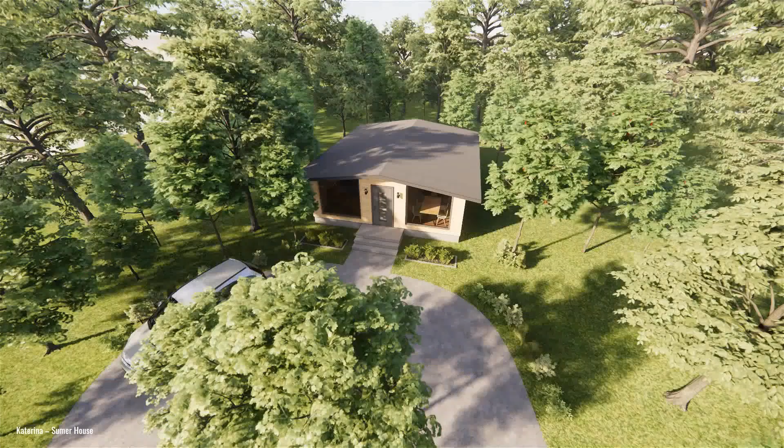So here's a little animation that I want to play. It might be a little bit choppy there, but I want to understand what you guys are seeing there.

Hopefully you guys start to understand not just the overall picture of the space, but also the movement and scale of your project. And if you're able to change stuff on your model, then you start to understand the project.

Let me just quit the share here. And this is the actual model here. So I'm actually driving this and able to go inside.

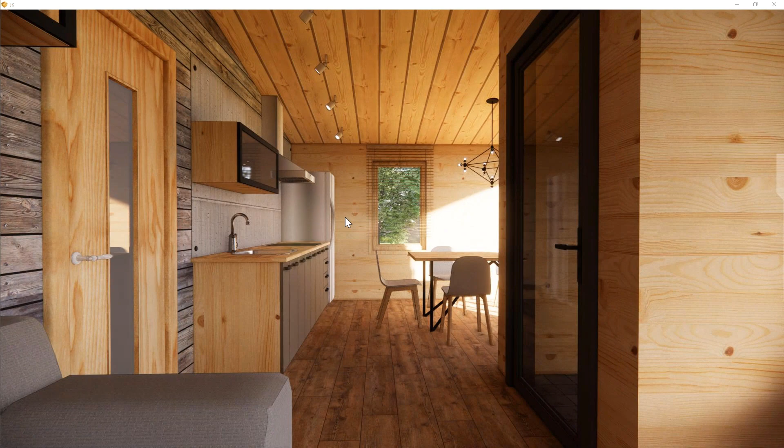Let me pull away from the Enscape side and then move on to the actual 3D modeling software. In this case, it's actually SketchUp.

Hey Joseph, there's a question here about what GPU you're running. Go ahead, there was a question about which GPU you were running.

Oh, I'm actually using an NVIDIA RTX 2080 Super at the moment.

I understand there's a bit of choppiness in terms of frame rate here, but I promise it's actually quite buttery smooth on my screen.

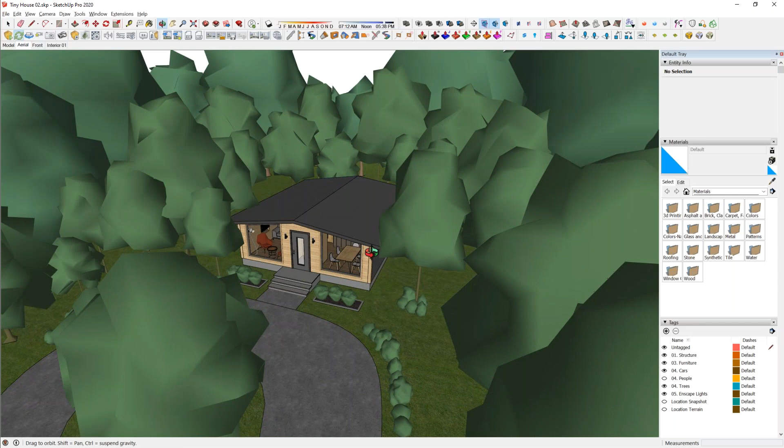So what you are just seeing is this model inside of SketchUp here. You can see it's more of a simpler format inside of SketchUp, yet it gets all rendered up inside of Enscape. So to show both screens at the same time, I'm going to snap one side to SketchUp on the left and Enscape on the right side. Then I'm able to either move out or just synchronize the view like that.

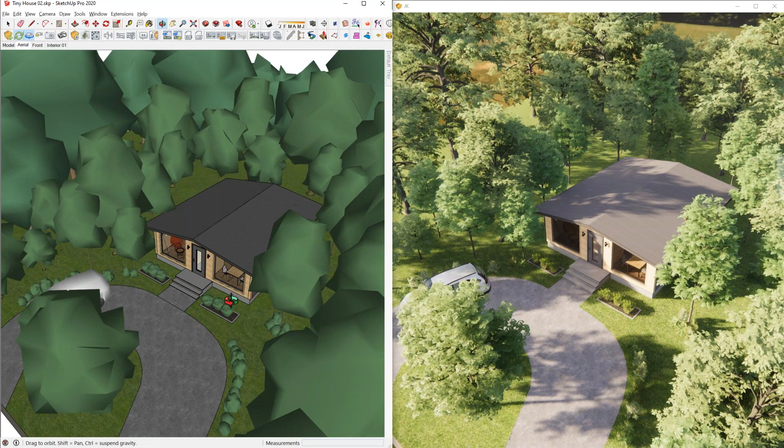This becomes incredibly useful because you can actually have the Enscape screen shown on your presentation screen. Let's say you're sitting inside the presentation room, or if you're doing a presentation, then you just maximize the Enscape window on your shared screen side. Then you can have SketchUp shown on your side so that you can navigate through your SketchUp model, yet your client sees Enscape on the presentation. So it becomes not only just an image, you're able to do this live presentation, as I am doing this live webinar format.

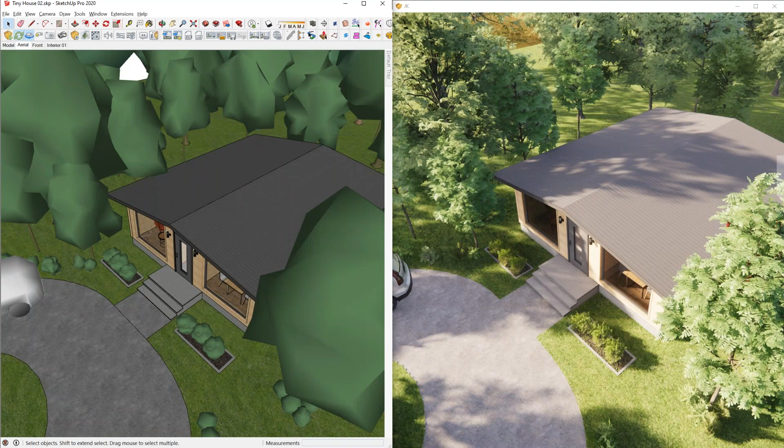So I mentioned about changing something on your projects. For example, we can talk about how much vegetation or how many planters we can have inside of your model. So we can go ahead and increase the amount, and everything will be changing on your presentation side.

Just to demonstrate, let me go ahead and change the cladding on the building here. As I apply that material, everything is immediate. So you start to talk about, okay, what would you like on your project? What kind of material? What's the size of the door, the size of the opening? What kind of lighting would you prefer? We can have that design discussion, and hopefully the architectural role people here would be able to appreciate this sort of design communication method that we have with Enscape.

So changing stuff inside of your model not only allows you to understand your project better, but also you start to connect together, so your client, your project, and yourself kind of become more emotionally connected. And it's so much better than just saying, okay, I have some ideas, let me get back to you in an email in a couple of days. I think having that discussion is really, really important.

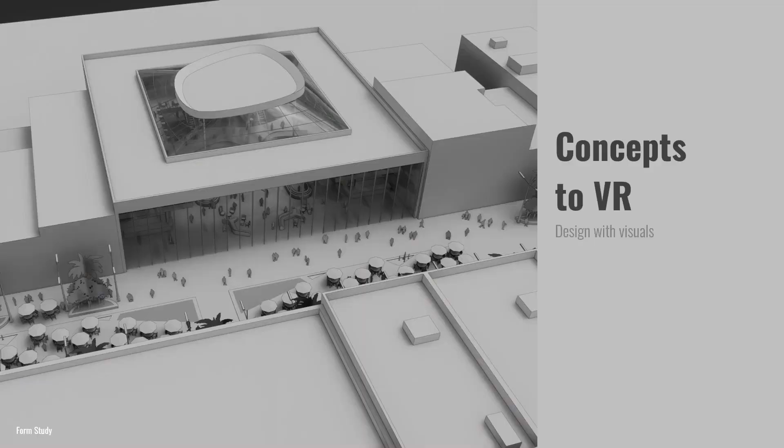So let me go back to the presentation. The next thing I want to cover is concepts to VR. This is the idea where you cover everything from the beginning of the project to the very end, and I just kind of snuck in VR at the very end. So this covers everything from programming to schematic design, then design development to construction drawing and construction admin, and then a very visualistic type of presentation with VR. VR could really happen anywhere during that process, but we want to implement the rendering process from very early on in a project.

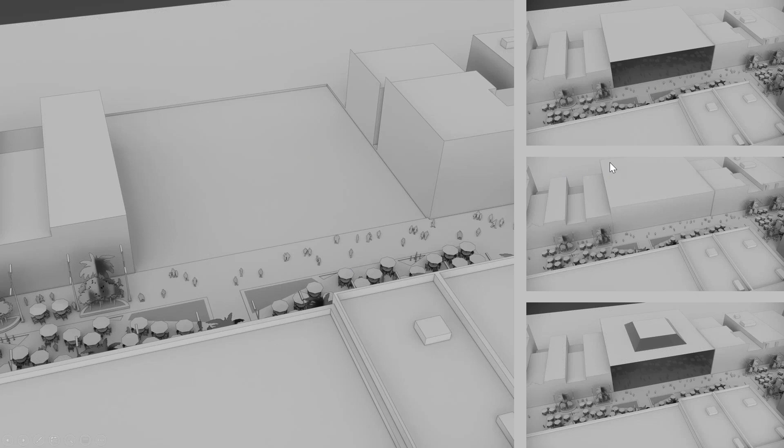So here is sort of a diagrammatic type of render. Obviously, I understand a lot of people are doing this already, but we are looking at the site and then start to do some openings or glazing, figuring out how we're going to fit into it.

Notice we took out all the material, overriding it so that it's shown in white mode, the clay render. This is actually part of Revit. I was just trying to do a storefront study, and the rendering accompanied by the drawings is really powerful because you start to understand the actual scale, but also what it does in terms of 3D view.

Some of your clients may just not understand everything in the drawing. If you showed just the plan, they don't really understand how the storefront is supposed to work. You're able to have that conversation of what the material is going to be, how big the storefront is going to be, and what the glazing is going to impact in terms of size. Some things that are not as apparent start to show up as you have 3D renderings or 3D perspective or orthographic views.

So you should use those together. Also with the rendering, you start to produce a mood board of the project. You typically lay out certain types of materials, do hand sketches, talk about the plan, and then start to put together how those materials really work for your project.

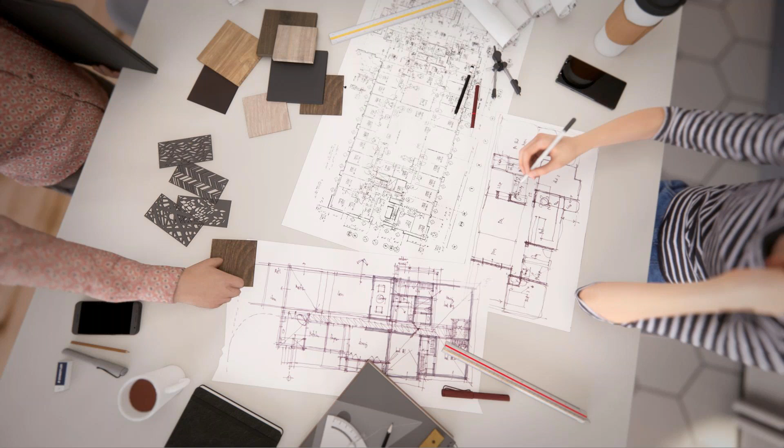Instead of just relying on the physical mood board, you can apply all of that to your project and show your client how those materials really play together. You show some architectural drawings to show them what the layout is like and how the materials are playing together inside of your project.

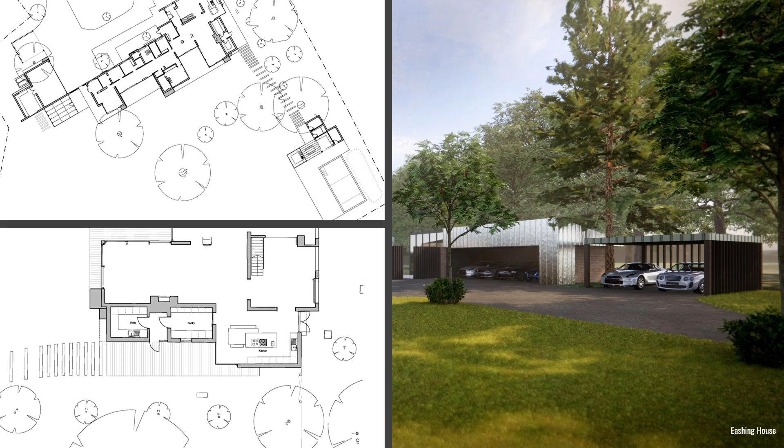Because all of this is immediate, it becomes really powerful. You can start to change certain aspects of the project - replace the brick with something else, or change the tone of the brick, and discuss whether that's going to work together or not. So you can really utilize the real-time rendering that it brings to the table.

Let me also mention - all of this is done inside of Enscape. You can invite your clients to wear a VR headset and be able to walk around those spaces as well. It is most beneficial in a space where you start to understand the scale and how the spatial quality is understood by your clients.

Something like an exterior shot like this, you may not experience as much, but when you jump into an interior - it could be a kitchen, or a really big commercial space like an atrium or retail space - you can start to walk around and really understand how high the roof is, or how high the ceiling is, and how big the openings are.

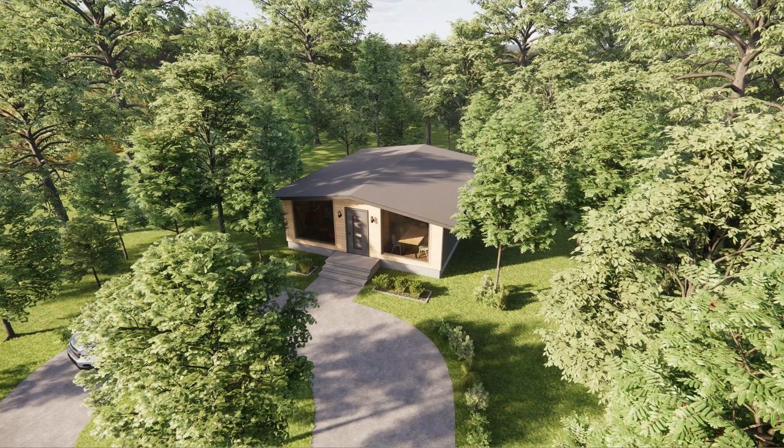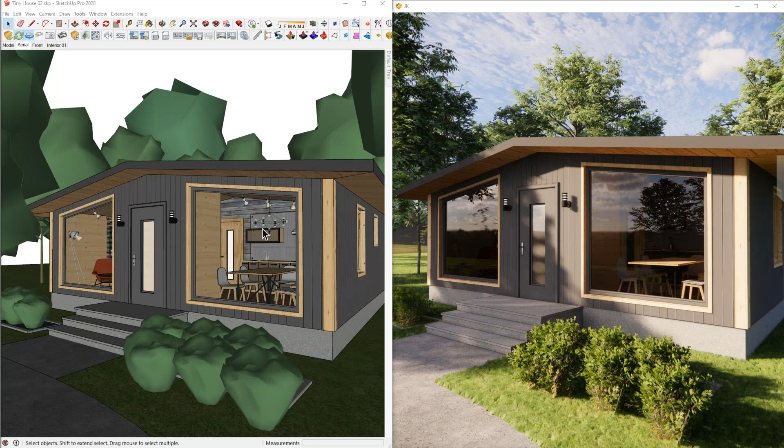So let me go ahead and show you what I'm talking about. The little tip I want to suggest is when you use the asset library inside Enscape. Let me pull up the asset library here. So if I go to vegetation...

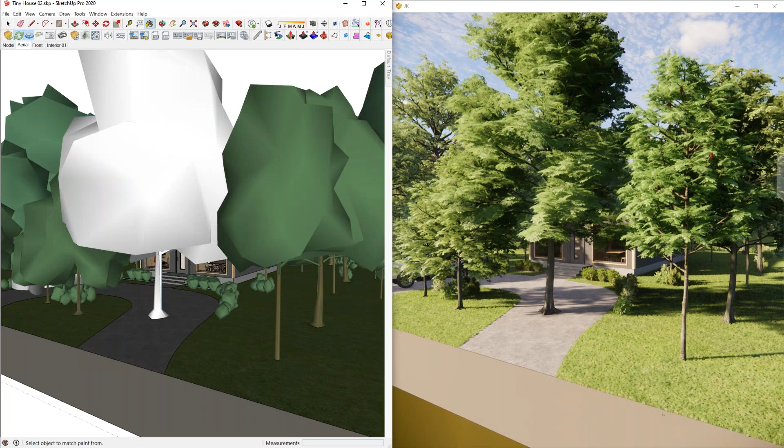And then put down any sort of tree here, you'll notice they come in as a white blob, and you can kind of see that it's a tree even without seeing the rendered version on the right. But it's more helpful to have the green and brown stem or trunk of the tree. So my tip here is to apply green onto the foliage on top - triple click and apply that color - and then also sample the brown trunk or stem color and triple click to apply that.

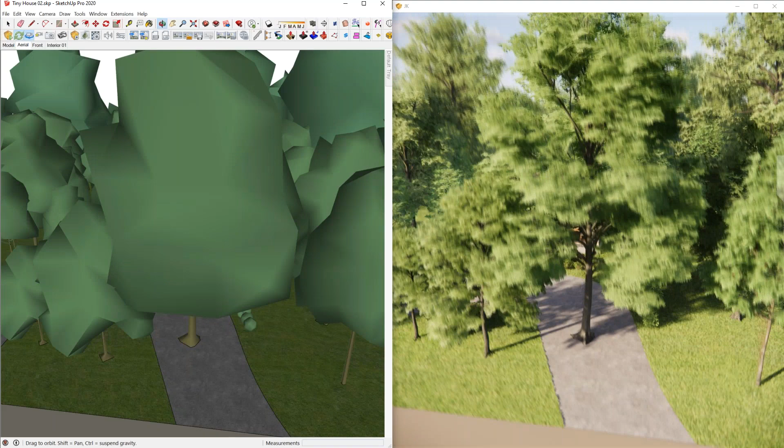Or I can actually just apply it to the outside, that way it just sort of receives there. That way it's more representative of what the tree is supposed to be, instead of having a white blob. That way everyone understands this is a simpler form of a tree - it doesn't take as much resource on your view, yet it renders up really well inside Enscape.

So hopefully you're utilizing much less of those white boxes, the proxy elements, and materials that are more representative of what you're supposed to see inside your render. That way it is not destructive.

Another thing I want to avoid as I work up my design is saving out any copy of the file, or saving out any unique scene inside your file. As you do that, you break away from your existing model to a rendering model, and you start managing two different models for your renderings.

That was sort of the known workflow, or used to be the workflow you typically do as you work up your visualization or rendering process. But we're starting to use rendering as a design tool, and we want to avoid that so we don't waste resources or time trying to do that.

So the overall goal is to make the CAD software, the 3D modeling software, a more simplified version, while Enscape is sort of the enhanced view mode that you can see. The render really needs to complement the design process, not get in the way.

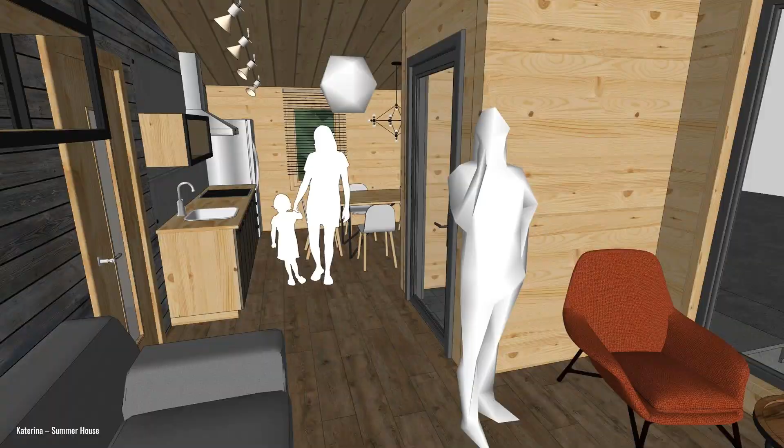So the next piece of advice I want to give is to focus on your project. This goes hand in hand with a non-destructive workflow, but also removing distractions. Obviously we want to work on composition that shows the story - what are we trying to show inside of your view? You want to center the things you want to show in the middle of the image or screen, and then focus on certain material, geometry, architecture, the space you're designing.

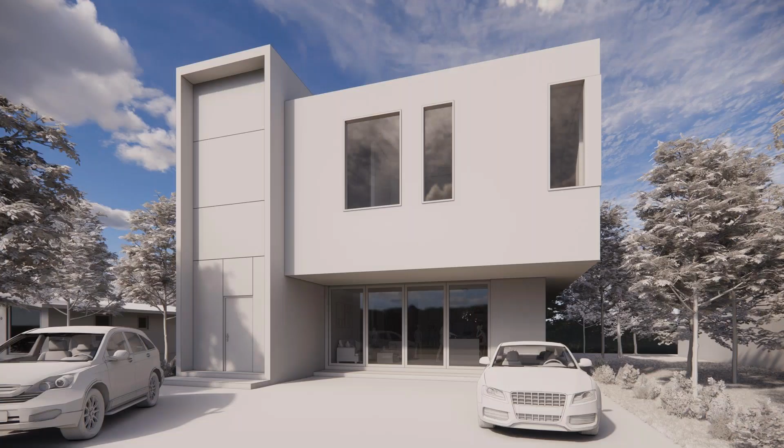So here I've taken out material completely. We all understand this as either clay render, white render, or material overridden view if you come from the other side. Sometimes I find materiality could be quite distracting - I don't want to discuss the tone of the wood and the actual patterning yet. I just want to sell the form and discuss the architecture we are designing, how it is floating above and attached to the vertical circulation on the left. So I want to utilize that mode, which is available on the Enscape side.

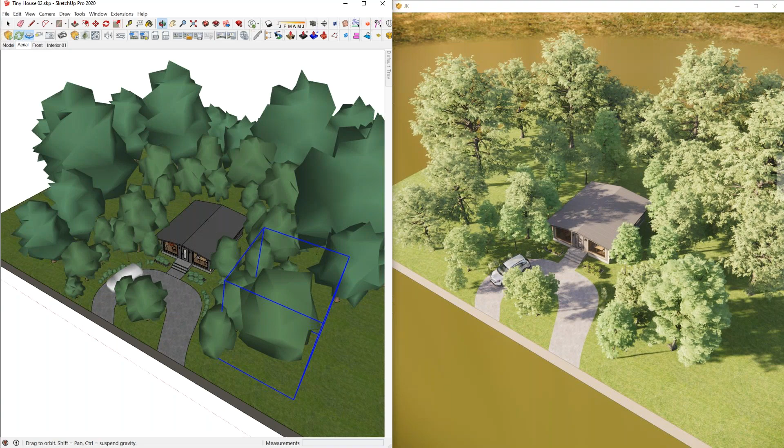Let me go ahead and break out to here. Under the visual settings, which is hidden at the moment - there's a button right there, and I can click on that. When this dialog shows up, let me snap this screen to the left again. I'm trying to wait for the screen share to catch up with me.

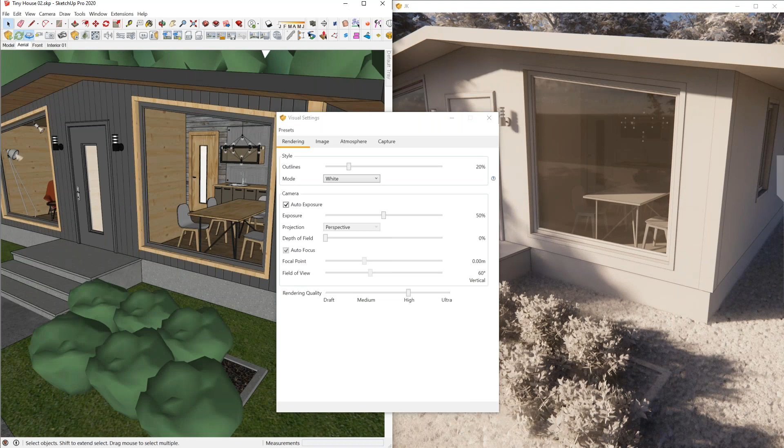So in here, as I have the view synchronized, I can just change the mode to white, and this is more of the material overridden view. Everything that is either glass or water is still understood as glass or water, but everything else becomes white. That way you can start to talk about the form and the space instead of a specific material being shown inside your visual. So that's what I like to utilize whenever I'm trying to present my project and their form.

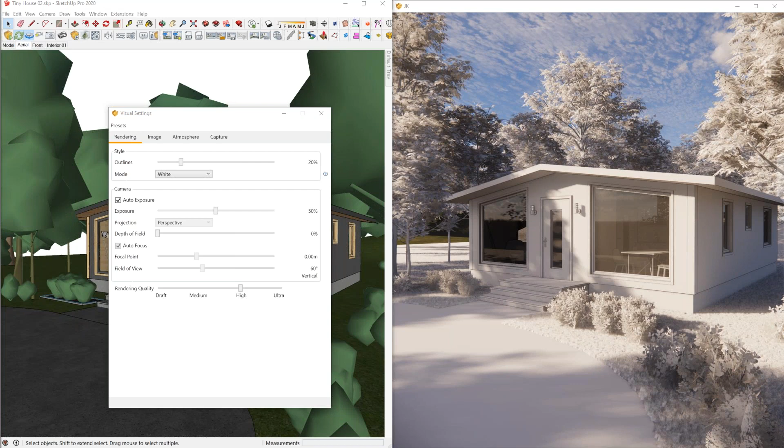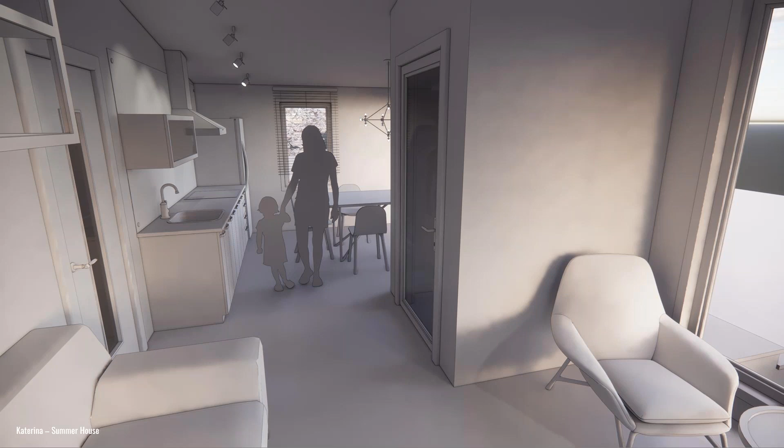So I want to bring this to the table since I saw a lot of people using SketchUp, people who are used to using SketchUp and Enscape. Let me go ahead and show this here, and then Enscape.

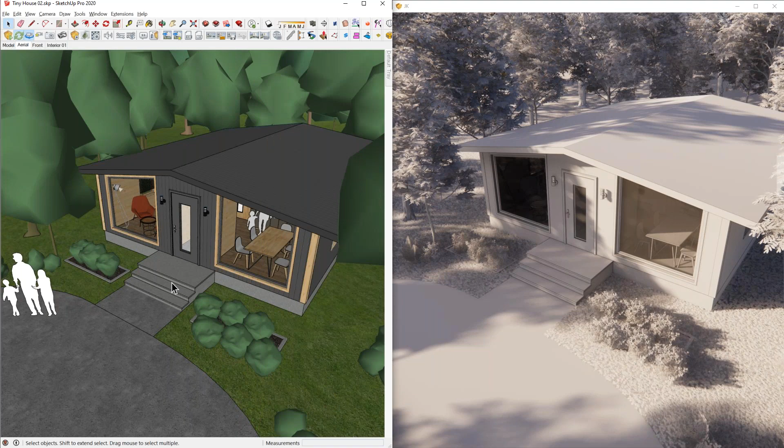So here I actually had put in some people into the model. If I turn them on, you can see these silhouettes of people. One of the great things about Enscape is that it understands these components coming from SketchUp, and no other real-time engines I've seen understand or interpret Face Me components this way. That's what they're called, Face Me components, and they're the billboard type that we understand from a CGI artist's point of view. You can orient the project and they just never show the side, so I advise using them as much as you can to avoid distraction within your scene.

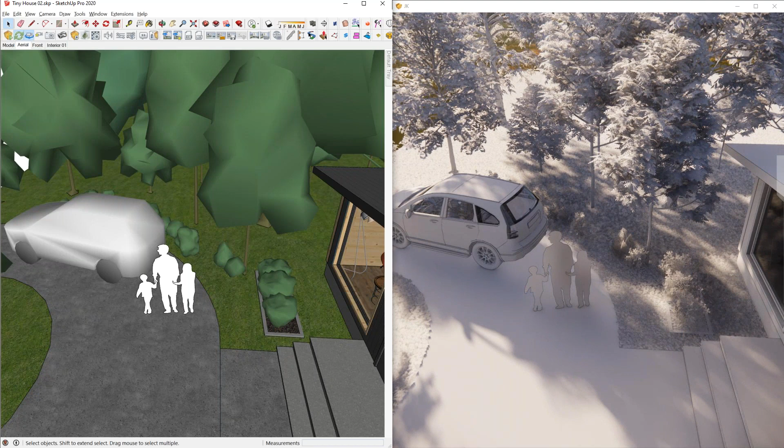As you rotate, they just never show the sides of them.

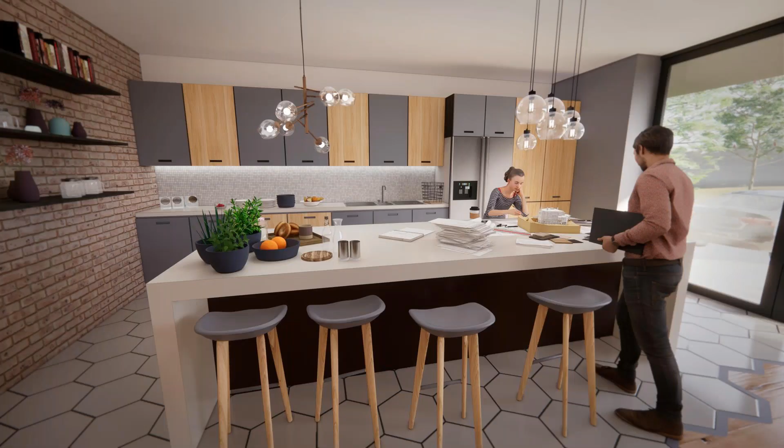So in here, I have used 3D people in the scene, and I can kind of see her face here. Your eyes may be drawn to her, but she's still in the distance. Right after that, you'll start to recognize how the materials are playing inside of this kitchen, or how much stuff is on top of a table. So you can still kind of build that story. People are working here on this corner of the table, and you can build that story into your renderings.

Joseph, there's a question here about the Face Me component, whether it's strictly from SketchUp or whether it can work with Revit as well. It's strictly from the SketchUp side. It's one of the perks you can benefit from. Unfortunately on the Revit side, it is not possible.

Was there any other question? Yeah, there's quite a few questions that have come in here. I don't know if you want to take some now or wait till the end. They were kind of more general questions, nothing specific to what you were presenting. Yeah, sure, I can answer a few more. I want to stay a bit more engaged. I'm actually having trouble seeing the questions here as the dialogue is very small. Sure, I can read those out to you.

So there was actually a couple questions here about where you get your materials from. I try to use as many native materials that are built into the software. If it's on the SketchUp side, I try to use as many native SketchUp materials, although they don't have a very good library. I generally try to Google some and then make image-based materials into SketchUp. Once they look good, I revamp them to Enscape type of material so that we can apply reflections and everything else. I find myself using the same material over and over because I like them, so at that point I try to save them as a library so I can use them again later. On the Revit side, however, you have a better library that you can use. Again, I try to use as much native material as possible.

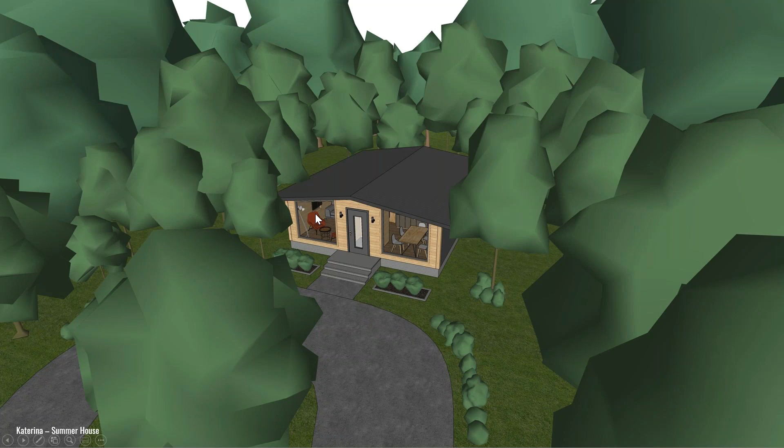This is a tree heavy project, the example I'm using. I'm avoiding a very complex project for this live webinar because I don't want to crash my machine or have that much risk. But here is a tree heavy project, and if all of those trees were materialized inside SketchUp with all the leaves and edges shown, it would really start to bog down my model.

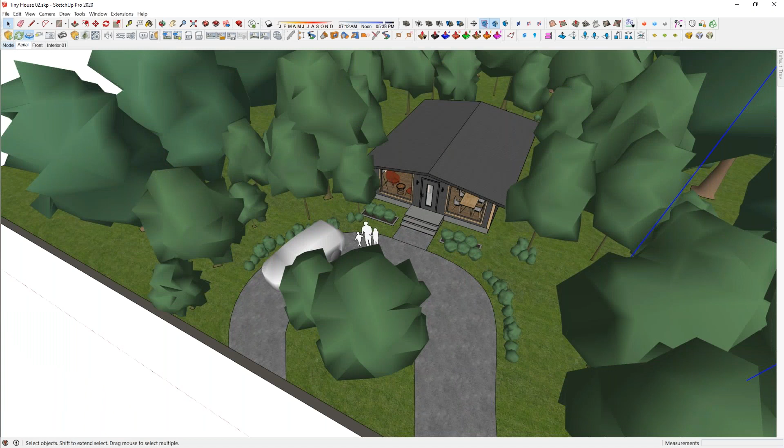So in terms of the actual modeling part, what I like to do is save a scene at the very top left as the very first scene inside SketchUp as a modeling view. In this modeling view, all the trees and entourages that I don't typically need are hidden. This one tree is the one I brought in during the webinar, so that's why it's showing up, but as long as I get rid of that, the first scene is sort of the modeling view.

And then all the following scenes are dedicated to a certain position or composition where I try to tell a certain type of story. That way you manage your model so you can quickly see the rendering view but at the same time model away.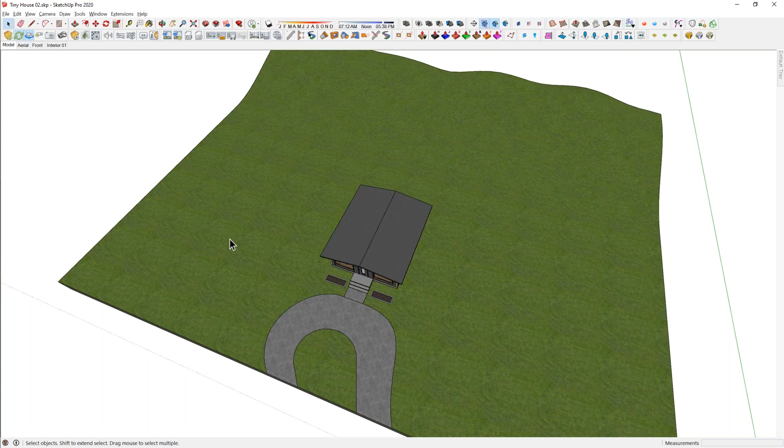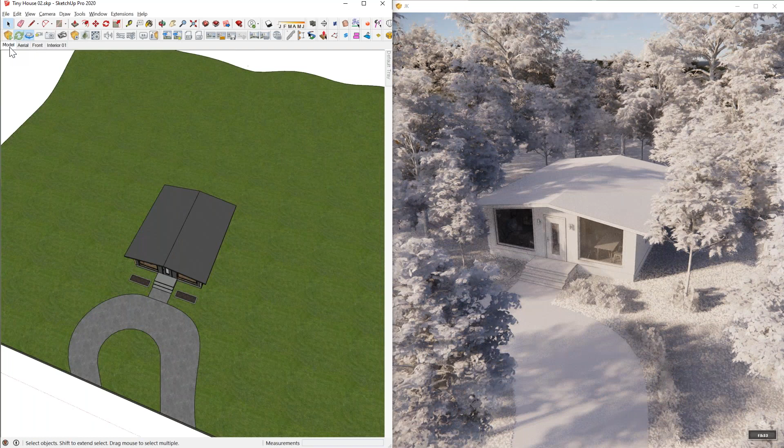As I go into the modeling view, everything was being done in the background, but if I go back to the Enscape view, notice how everything switches back and forth — aerial view, modeling view — you can just snap very quickly together. If I don't have this synchronized, it won't follow me like that, but I try to go in between so I can quickly model away certain things.

Going back to the slide, I want to utilize that sort of switching on and off to keep things isolated.

There's also usage of layers, or what they refer to as tags inside SketchUp — they just changed the naming from layers to tags. I try to use that as much as I can. In terms of layering, I know someone's going to ask — I have a bit more robust layering or tagging system, but currently in this model only people, cars, and trees are being utilized. I also have another tag dedicated as Enscape lights for the light cones I implement into the interior scene, so I can toggle them on and off very quickly.

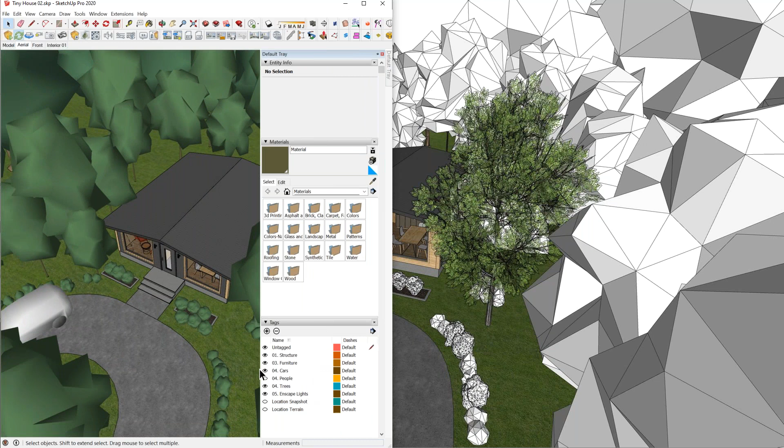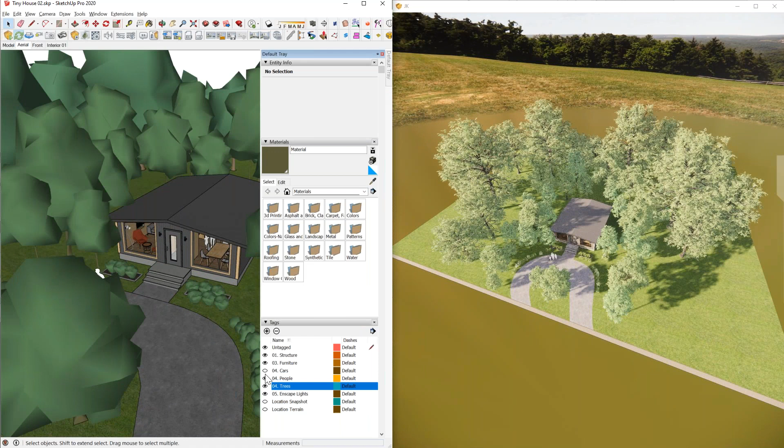So in this case, I can just toggle off the cars or the trees, and everything goes away quickly. This is a presentation view. Let me snap back to the more normal view so you guys see what I'm talking about — just putting people, cars, trees back into the scene. Just try to utilize that as much as you can.

To bring the point across, I also have Revit ready. So here, if I want to hide all the entourages or assets coming from the Enscape side, I just go select one of those elements, and then I can either temporarily hide them. Here I can go to hide category, and as I do that, it may take a moment.

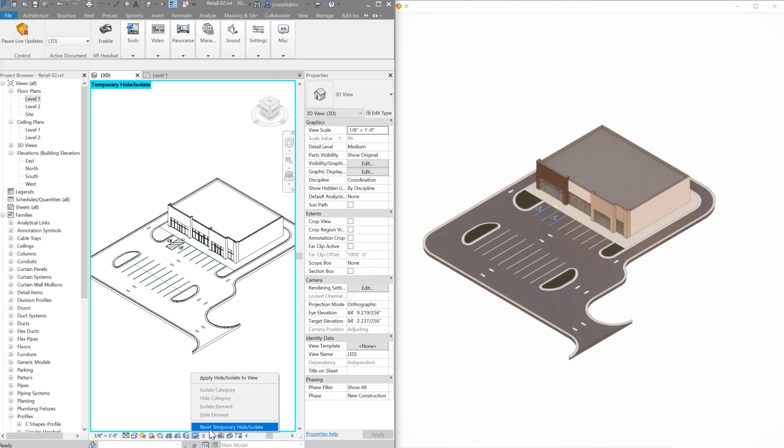Oh, this is a plan view, sorry. Same thing here, then hide category, and as I do that, everything should go away in your Enscape scene. And then I can reset everything as needed back into the scene.

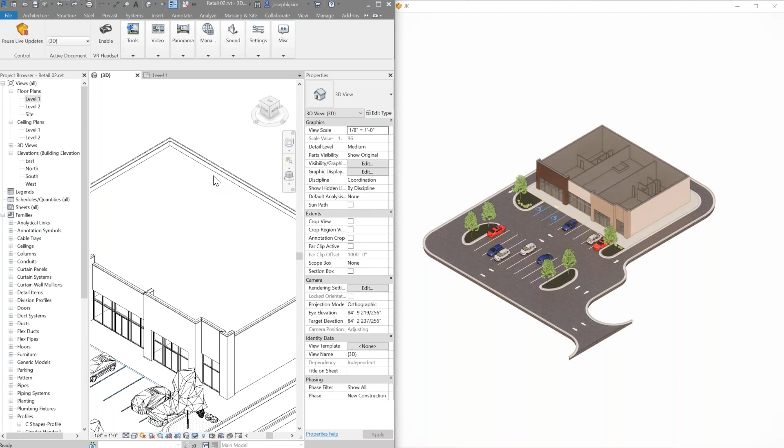I use this process also when trying to see stuff inside the building. I can highlight either the roof or ceiling and just hide the element — this is just a temporary hide. If you want to hide something completely because you don't need that tree altogether, use EH for short, and I can hide that element altogether. If I need to get it back, I hit RH to reveal hidden elements.

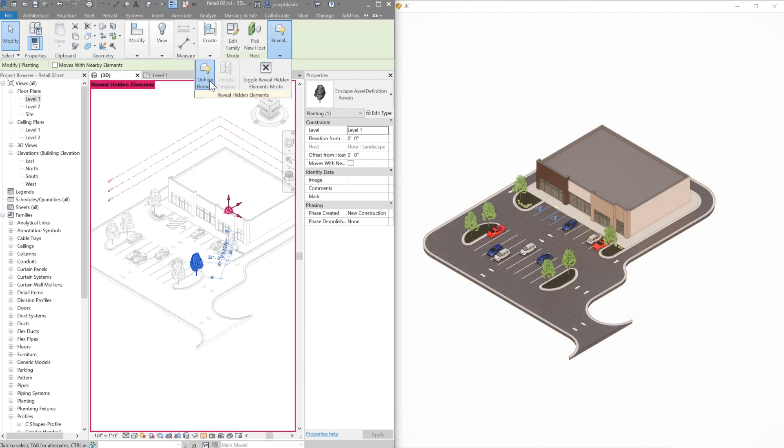And then I can click that one and reveal that element back, and then right-click again to get out of this mode. So that way you can quickly toggle certain things inside of your model if that is bogging down the amount of resources being utilized.

I do have to admit that some of the assets that come in on the Revit side may be triangulated heavy as this, so you may want to just hide them altogether as a category inside of your plan versus showing them in your 3D view.

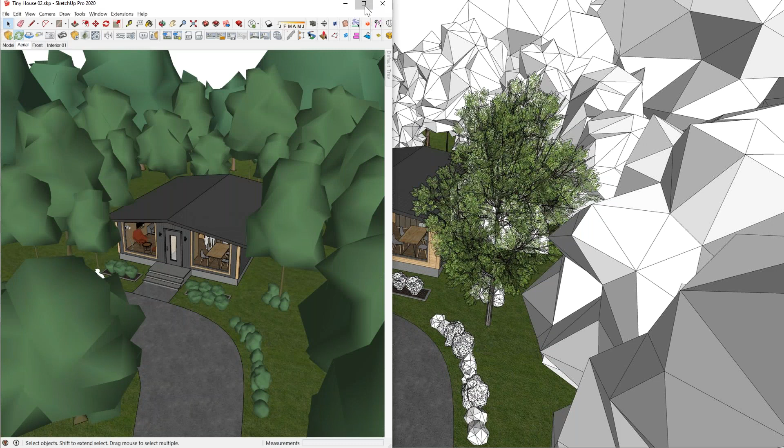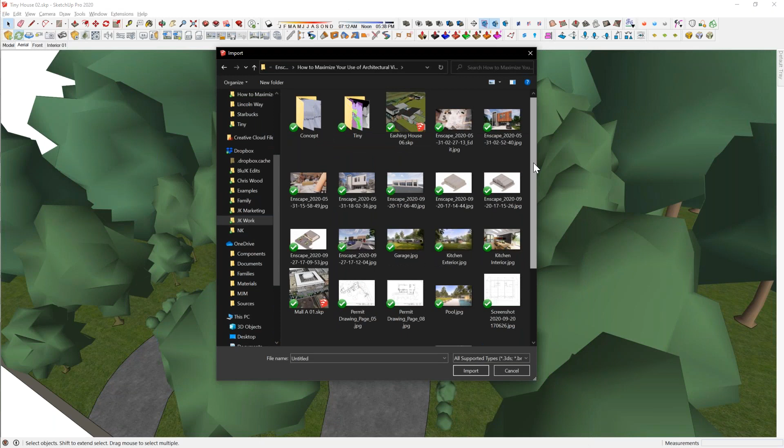Another point I want to bring out here as I maximize my SketchUp scene, if I go to File and Import, I can go to this folder where I had saved out a tree, and I can import this tree into the scene.

This is more of a SketchUp 3D Warehouse type of tree that you will find, and notice how it has leaves and everything, but I don't have any of the edges shown, which allows SketchUp to easily handle it. My computer is still powerful so it can handle a single tree, but if this becomes hundreds of the same tree with all the edges shown, it would be more difficult to show and render in your viewport.

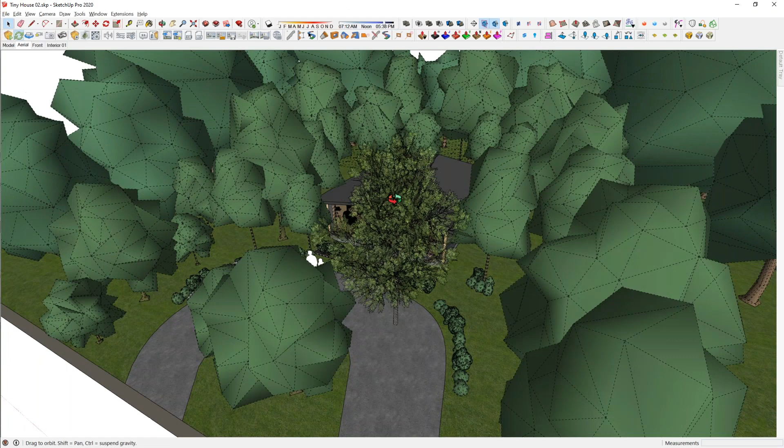If I start to show all the hidden edges like this, I immediately notice a bit of frame rate being dropped. I'm trying to see the audience view to check the delay, but it becomes choppier, especially with a lot of these assets.

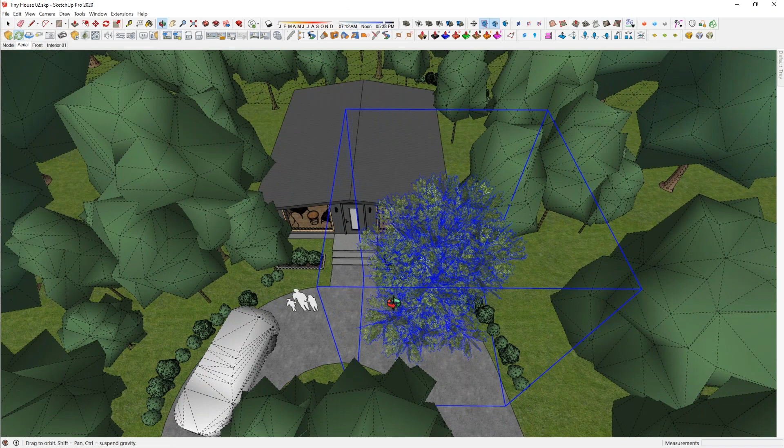So I would try to avoid edge-heavy elements. If you've imported an element that has a lot of edges shown like this - I'm just unhiding all the edges so they're all shown - you can really be slowing your machine down.

If that's the case, you can double click into those things, then double click to select the face and all the surrounding edges, then deselect the face. From here, right click and hide. As those edges hide away, it becomes much easier for your computer to handle.

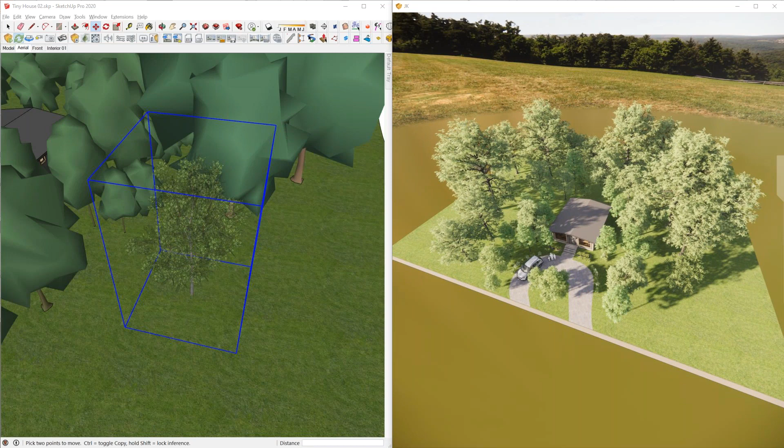Let me put this to the side and show you what that looks like inside of Enscape. Let me synchronize the scene. So that tree still looks fine, it just doesn't move like other Enscape trees. That way it's not taking up as much resource, but still looks okay in your scene.

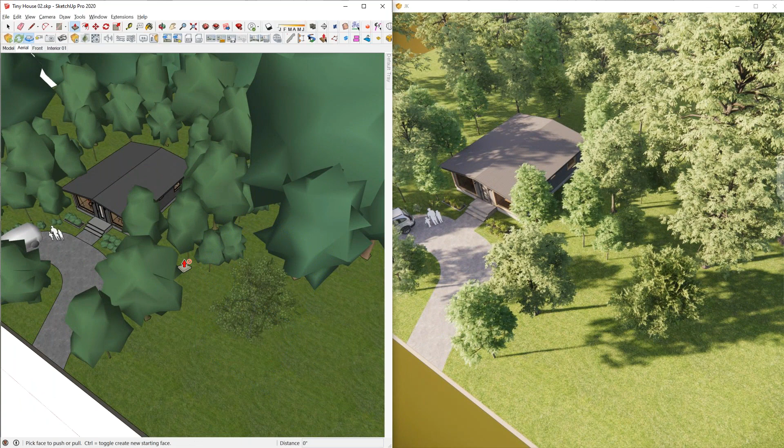I'm just using tree as an example since it's typically very edge heavy, but any other objects like cars, specific equipment, or furniture that you're trying to bring into the scene - you can apply the same method into your model. Here we covered coloring the trees for the assets coming in.

I even apply a little bit of color to my car as well, as the wheels come in as white. I just applied that color so everyone understands or sees the blob of the car.

I will certainly turn off all the shadows inside of your SketchUp side, because Enscape handles shadows a lot better than you can inside of SketchUp. Therefore, I would certainly turn off all the shadows in your scene - I would not turn them on by default.

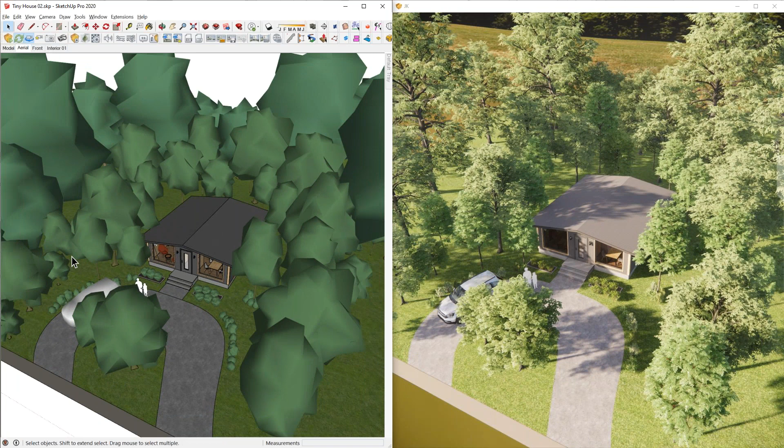Sometimes, as I mentioned, try to use proxies. There are two ways to utilize proxies inside of SketchUp when using Enscape. One way is to have an element that comes in like this, then right click it and save as an external model for Enscape.

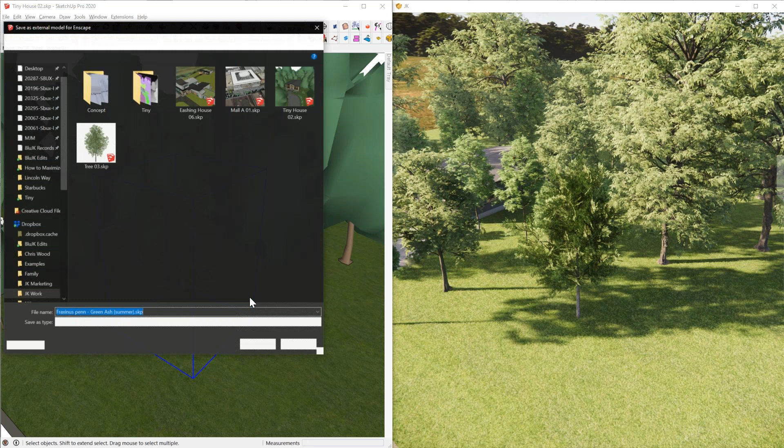And then I can save that out to my desktop. As I do that, it becomes that wire box I was talking about earlier inside of your modeler, and becomes a tree, or actually a better looking tree inside of the Enscape side.

From here, just to stay true to a non-destructive workflow, or continue with the shape that makes sense into your view, I go in and double click. Let's say I just copy this tree and then double click into this component and paste it into the view.

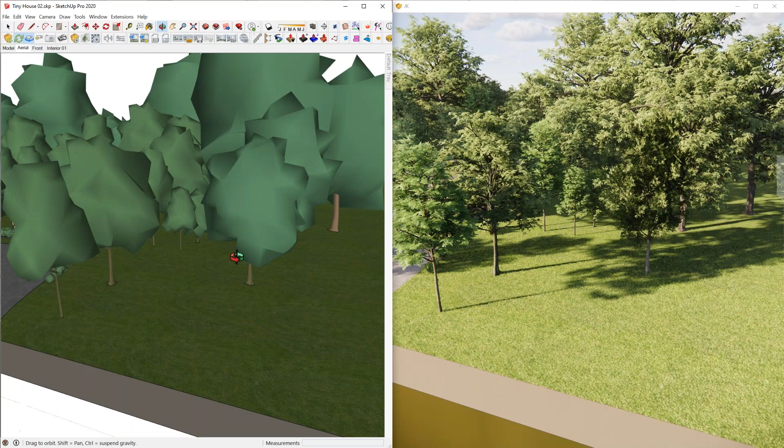I just triple click on this box to get rid of it, and in your scene it shows up as a blob of a tree. I can apply the same color so that it just replaces it, and either copy that or scale it differently so it's somewhat randomized. That becomes your custom asset in a way.

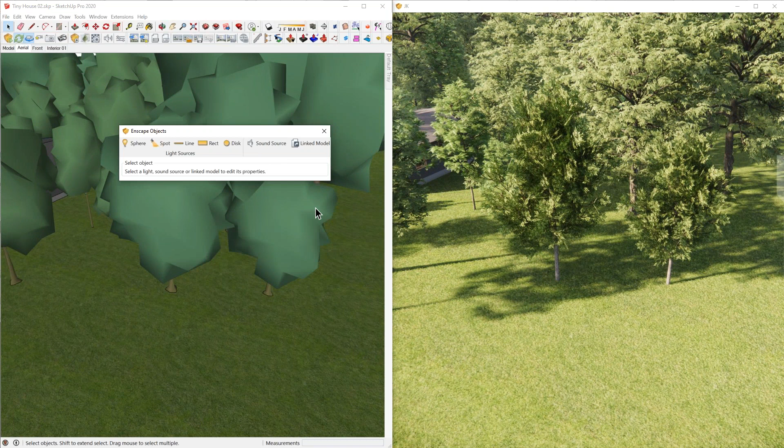Another way is to go into your Enscape objects, and the window shows up like this. Then I can do the linked model, so I can link in a model that's outside of SketchUp, and it comes in as a box again. You'd have to do the same practice of replacing this geometry with meaningful geometry that replaces the simpler look.

I'll go over other things on the slide here. The next one I want to mention is Enscape Toolkit. This is basically all the extra features that Enscape brings to the table for either SketchUp or Revit, so it helps your designing process, not just as a rendering engine, but starts to build in some more features into the design workflow.

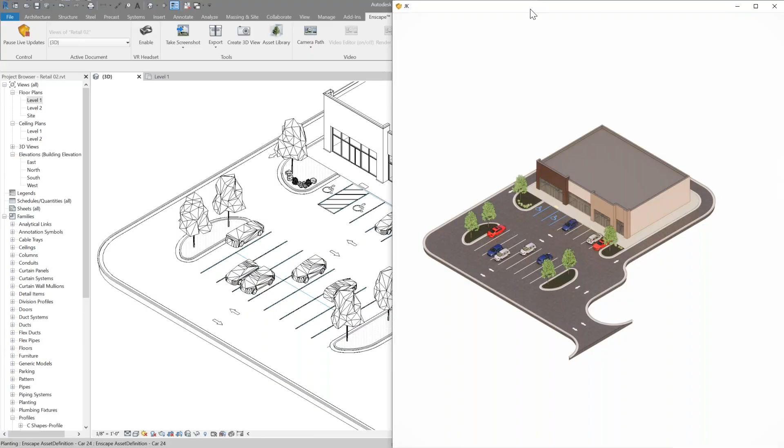The first one I want to mention is BIM mode, especially on the Revit side since it's BIM. Inside of here, I can hit H. There's a little HUD that's usually built in, and right now it's in ortho mode, so I'm going to change that from orthographic to perspective. Then I can hit B once, and that goes into BIM mode. I need to show my taskbar.

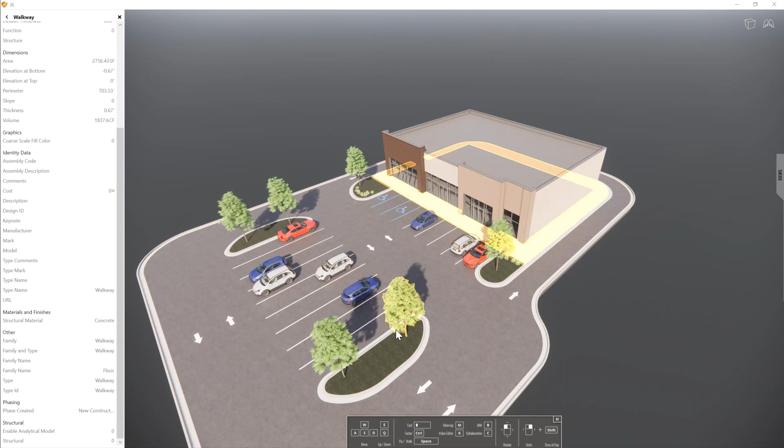In BIM mode, I start to see all of these elements being used inside of your model, and as I highlight them, they highlight in the list as well. So I can select this one, walkway, and they start to highlight what that walkway's material is. You can immediately see what material you're using for that specific element, and it becomes really useful because finding the material used for your project inside of Revit isn't as easy as it seems. So having this list view in your scene is really useful - that's B for BIM mode, highlighted in the HUD.

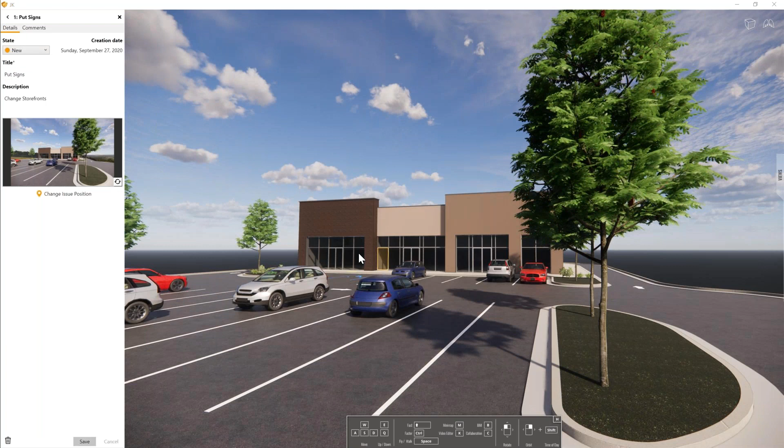Also collaboration mode, which is C. Collaboration mode is a recent feature they've built in, and basically you can start to have a commenting system inside of your model. I can have certain comments or feedback so your colleagues or client can highlight certain aspects and create an issue, and I can issue certain types of things.

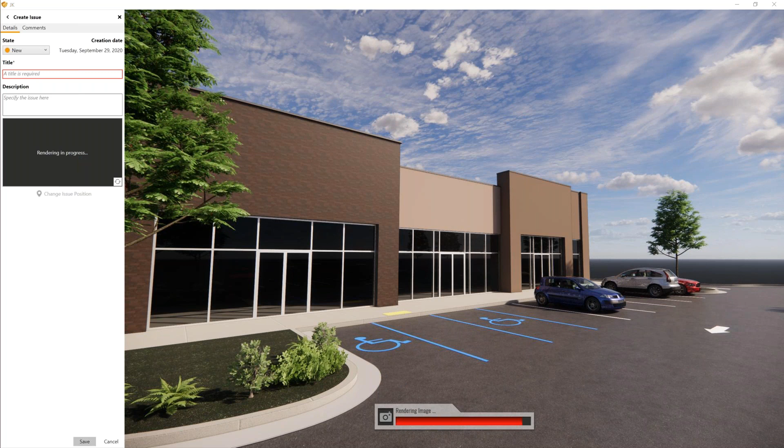Let me go back here and try to save a different view. I can go over to something like this and say, oh, I need to see a sign here. So create issue, and start to have a rendered image into your specific issue. Then I can say, let's put sign, and put down a description. Later on you can see what they've left in your model, address those issues, and delete them afterwards. So collaboration mode isn't built into Revit, but something Enscape has added onto the Enscape Toolkit.

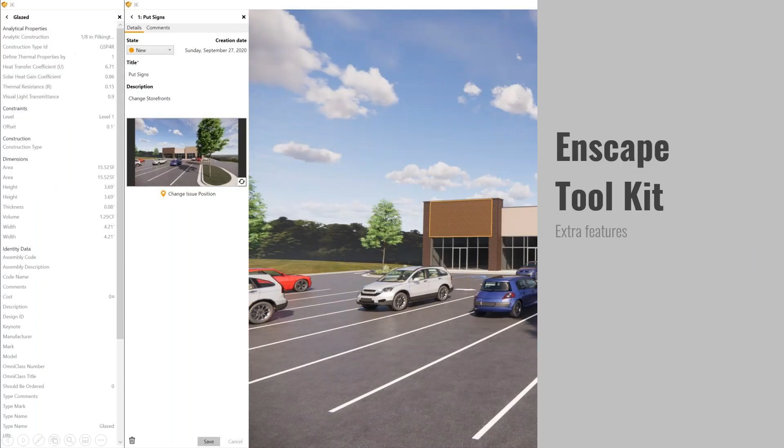Let me move on to the next scene here. Another Enscape tool I want to mention is the standalone, and there are two types available: one is EXE, executable standalone, the other is web or browser standalone. Basically you can share an EXE file with your client so they can literally double click and walk around and do the walkthrough themselves without holding a license or anything like that. It's a great way to share your model with a colleague or client.

Another way is to do it through a browser. It has lesser fidelity, however it's much easier to run. You don't even have to share a file, you can just share a link with the web standalone, and that becomes a really powerful way to share your design. You can have them walk around themselves and then talk about certain aspects of your project rather than just showing a slideshow.

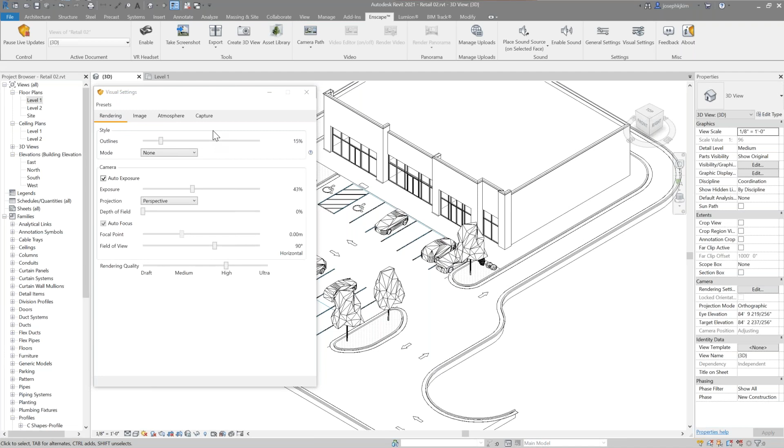So this brings me to my last slide, with a few extra tips. The top of the list is the outline function. Anyone from a CGI background would know what ambient occlusion is, and it kind of does that without being too technical. In the rendering settings, I like to put a bit more outline in my scene, which gives a good amount of definition to the faces of the objects.

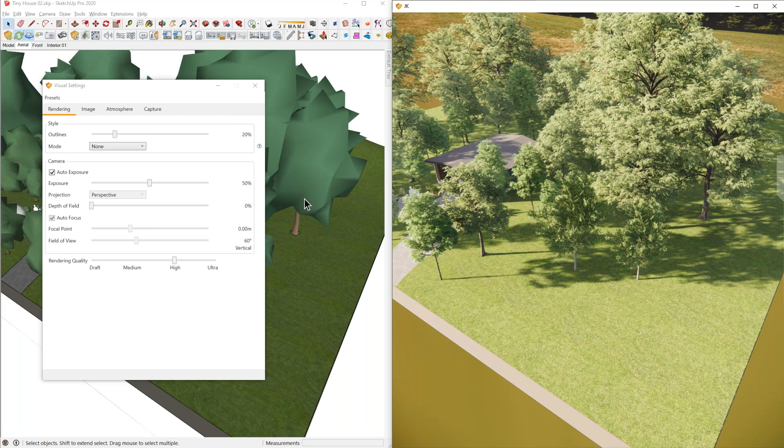Let me zoom into a certain area. This is most apparent in a white view. When there's a fold in a face, for example here, the outline makes it more defined, so you understand the geometry a lot better than you would without it. If I reduce it, it becomes a bit more bland in all of those places.

The treads of the stairs aren't as apparent, and all the trimming work in the window isn't as defined. But if you increase the outline, that becomes more defined, and that's essentially what ambient occlusion does. This becomes very useful when defining the faces in your rendering, so I like to put somewhere around 20 to 30%, depending on my mood.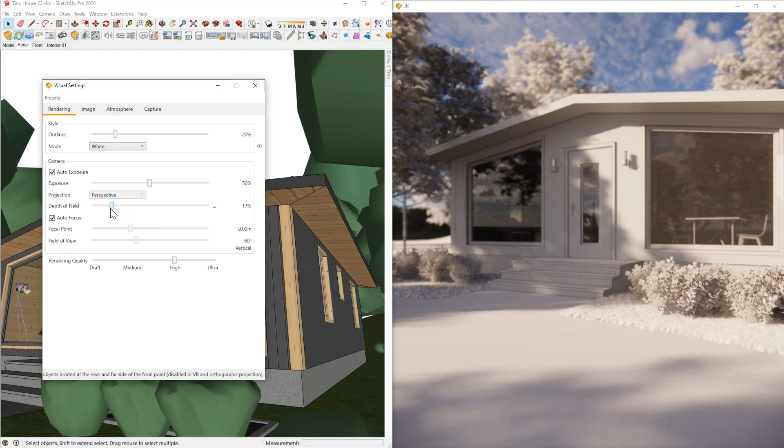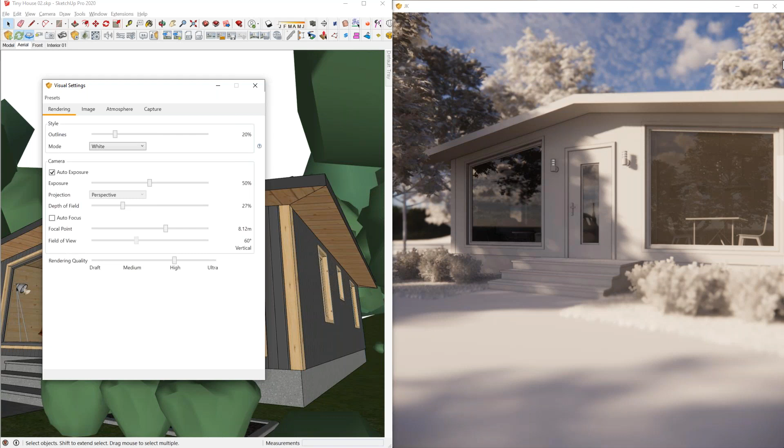You can also utilize the depth of field effect. If you increase this bar, puzzlingly, it reduces the amount of depth of field, so as you increase it, things become more out of focus. You can uncheck this and use the bar to change your focus point, avoiding focusing on your background so that it becomes faded out while you focus on your project.

Let me back out a little further. I can change the focal point visually, and everything else becomes out of focus, or shallow depth of field if you're more used to that technical term.

Another way to focus onto your project is to introduce a bit more vignette into your scene. In the image tab, I can increase the vignette so the outer edges of the screen become darker, bringing more focus to your project. With those three practices, you really focus onto your object, project, or design in your scene - extra little tips for renderings if you aren't used to some rendering practices.

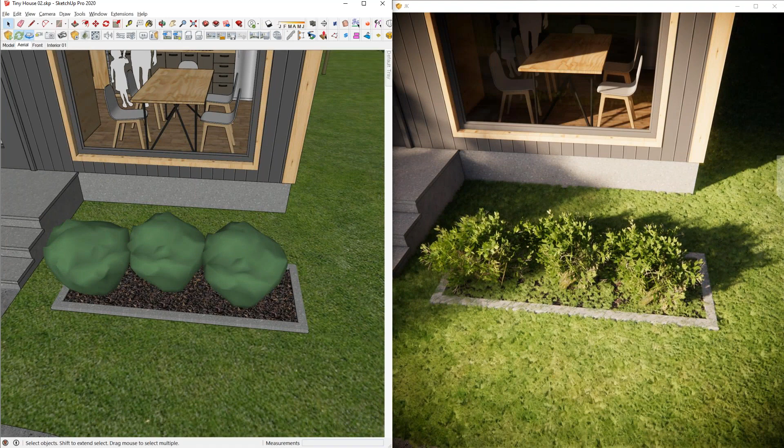Another word of advice is to add a bit more imperfection in your scene. Let me remove the depth of field for modeling purposes. As I copy these planters, I've rotated them around and put them out of whack in terms of alignment. Same thing - I'd attempt a similar approach with these furnitures.

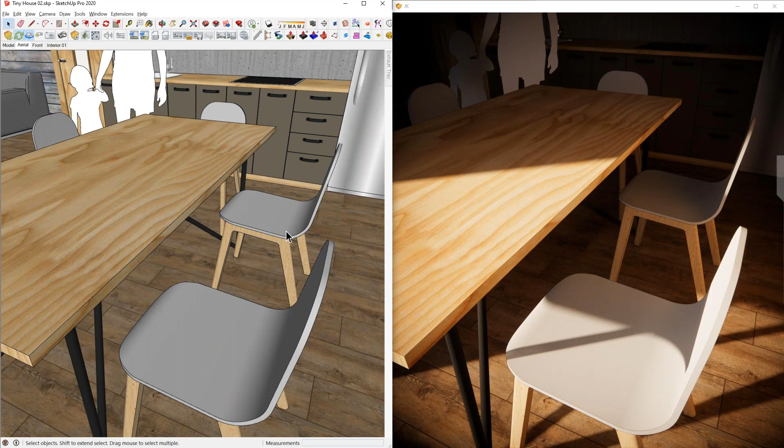As these chairs take up the space, to add a bit more realism, nobody would line all of these up perfectly. So the practice we usually go through is to actually mess them up a little bit, putting them out of alignment. That way it seems more realistic than everything being perfectly 3D modeled. It's such a little thing, but it really adds additional detail to your scene and composition.

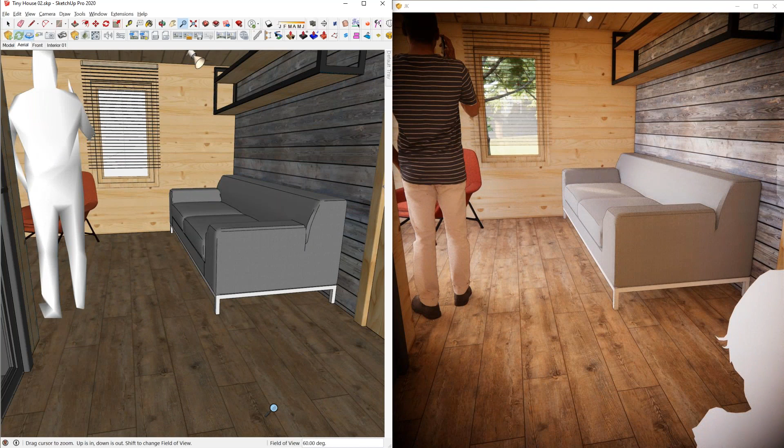Lastly, because this was such a small project - by default inside SketchUp your field of view is 35 degrees, and that doesn't really show much in your scene. You capture very little, so I start to increase the amount of field of view inside SketchUp, just so I have a bit more modeling screen real estate, but also inside your visual settings.

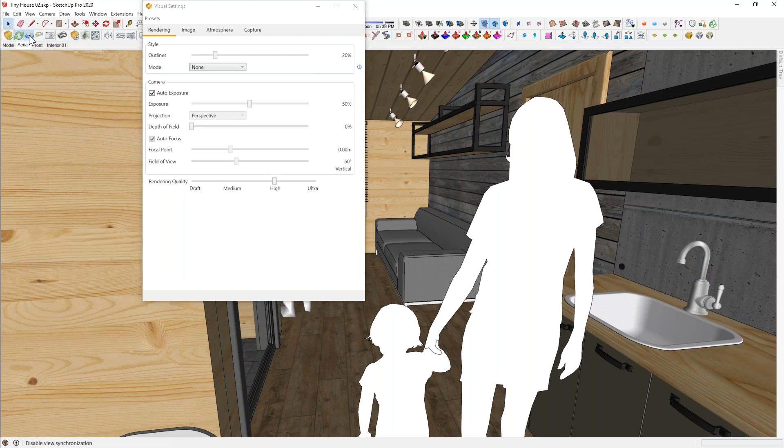I can increase the field of view, and that's grayed out because I have synchronized view. But as I do that, I can increase the field of view that's available on the Enscape side, so you start to capture more into your scene. Having a wide lens in physical space for your DSLR could be quite pricey, but here it comes free.

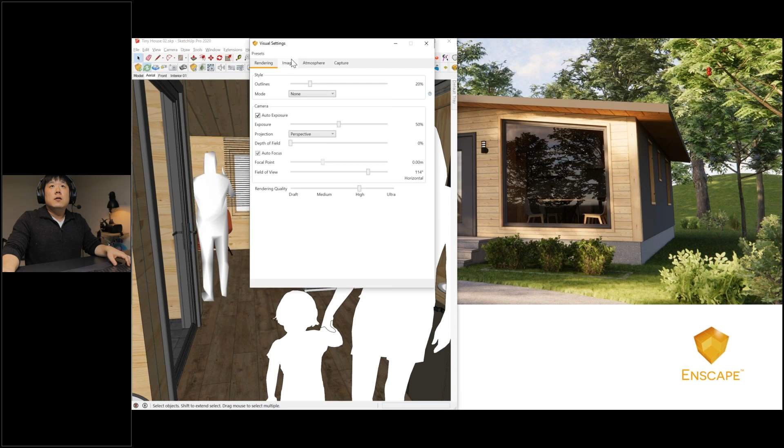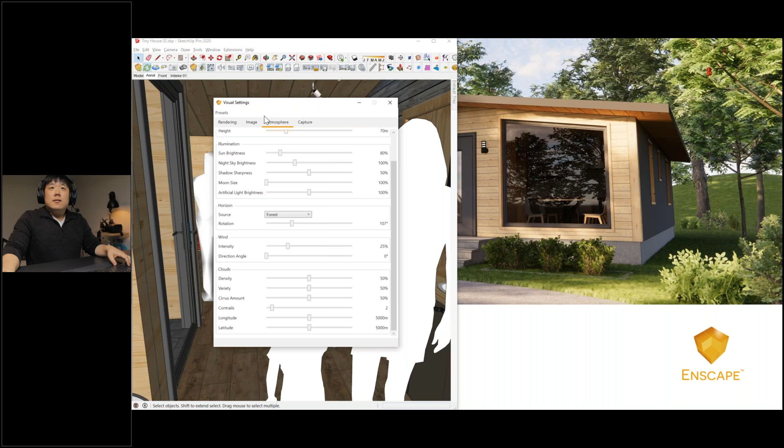Can you use a background HDRI image resized to fit the screenshot? Yes, there is a way to do that on Enscape's side. Let me quickly show. On the rendering side in Atmosphere, you can change certain types of background images, and there used to be an option to load the HDRI. I did a tutorial on it and they just changed where the button is, so I'm not able to show for some reason. But yeah, you're able to bring in HDRI as far as I'm aware.

This was towards the end of your presentation when you were showing the sharing permission. Somebody had a question whether you can share with permissions if the project is NDA. For the web link, no, I don't think so. And I guess that's what they're referring to, the web link, the standalone. Yeah, not directly, not that I'm aware of. It's a security over ambiguity thing.

Question here about whether or not Enscape models can be edited. So I'm understanding that as a standalone - no, you're not able to render up a scene. Obviously you can screenshot, but you're not able to render up your scene nor edit the standalones that are out. So it's essentially a viewer.

Question here about when should somebody use an Enscape asset versus the native ones from a 3D modeling software. So, which one is better? I guess just when to pick one over the other - is there any advantage to using one versus the other? I find it's better to use Enscape assets when possible. Obviously, your project has to be exclusive to Enscape in order to do that. Otherwise, again, same thing about having the replacement or proxies that show up on your scene - if it's a blob, I don't want that to not make sense for people who aren't utilizing Enscape.

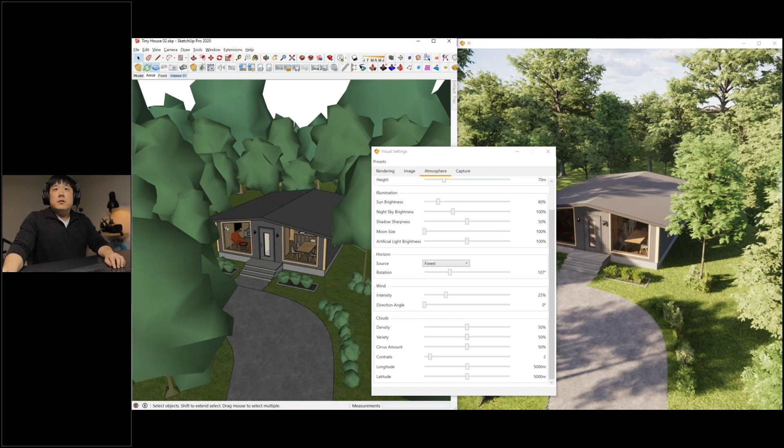So for example, the aerial scene, I have this specific - let me synchronize a view. So on the aerial scene, I have this preset of load preset, load from project, and I have two different settings that are saved. For exterior setting, I just click on this one, and that is shown. Whereas if I go back to interior, then I can go to presets, load presets, and I can go to interior, so that interior preset has been loaded into your scene.

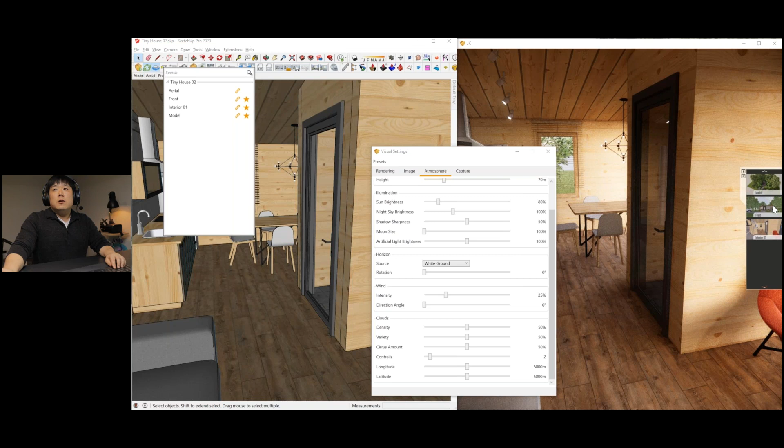And you can also, on the manage view, favoritize all of those views that you have so that you can quickly toggle inside of Enscape. There's a little bar that shows up as you favoritize certain types of views, and you can toggle in between. And then you can also dedicate those settings to a particular view, so as you flip them around, the lighting or the render settings kind of change.

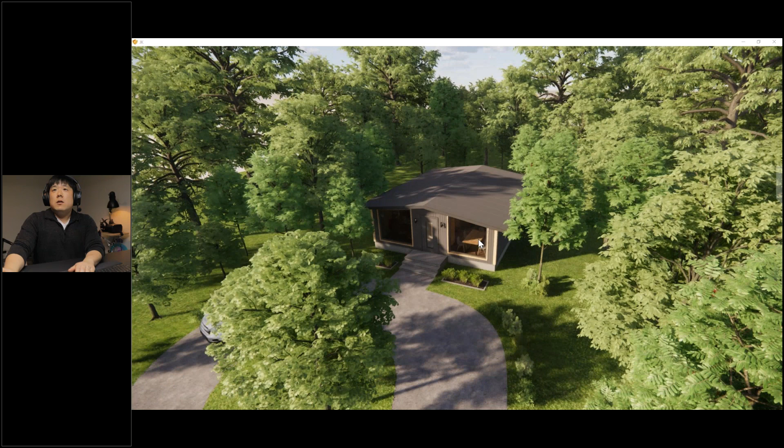So my way of going between SketchUp scenes is to hit page up and down, that's a little tip there. So page up to go to the modeling view, the aerial view, front exterior, and then interior - but that's just a SketchUp change. If inside of Enscape, you can use the same shortcut key of page up and down. So page down, and then I go to the aerial, close up, and then the exterior, and then it switches to interior.

I guess while we're on this, this will be the last question - how do you save a visual preset? So that was pretty much how you do it. If you go to visual settings, under preset, this button here, save preset, I can save to a project with a certain name. I already have these two, so I can do interior, or I can just say test for that scene. Or if you want to save it out as a separate file, you can do save to file, and then that will bring up a dialog, and you can just save the settings so that you can use it from other files as well. The loading process is exactly the same - either you take it from the project or load from file.